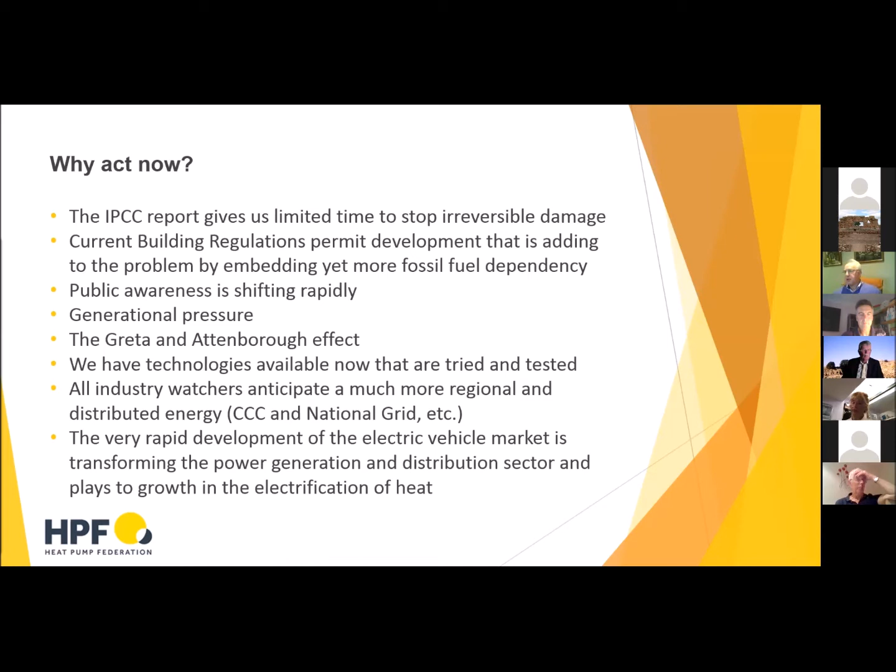So what's held us back? And I think this is one of the questions that people probably need to have some view on: why haven't we got lots of heat pumps already? Well, the simple fact is that we've had government policy since the 60s that favours North Sea oil and gas. That was seen as a massive asset, and indeed it was a massive asset. And successive governments have chosen to effectively give low-cost gas to the public for the last 50 years.

By contrast, if we were in Norway, the Norwegians chose not to burn any of their North Sea oil and gas. They sold the whole lot, put the money into a national wealth fund, and now own something like 4% of globally traded stock. Unfortunately, we don't have any legacy like that to look back on from our North Sea oil and gas time.

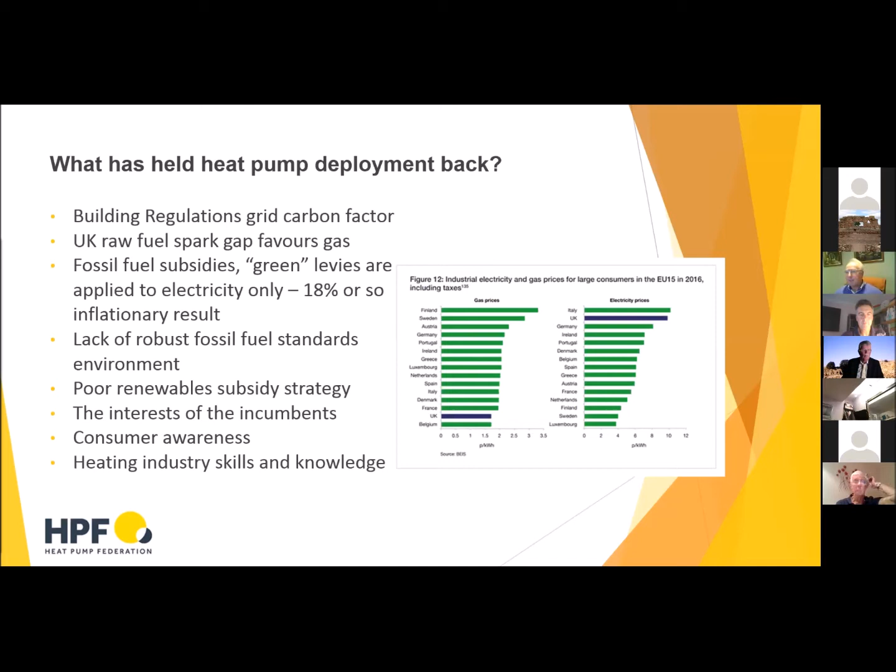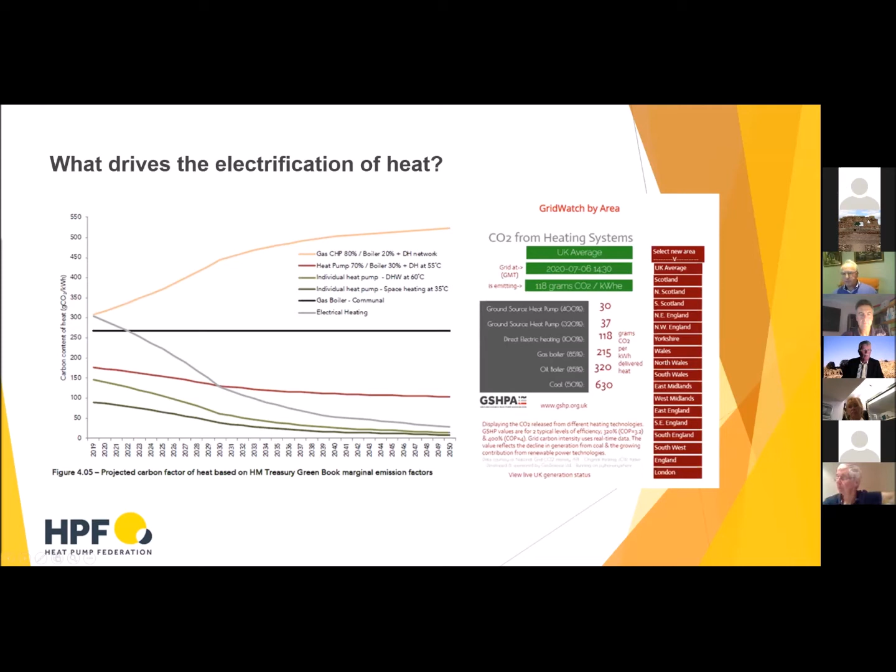So to heat pumps at last. I know you were thinking, when's he going to get to the heat pump bit? Okay, so here it is.

So what we've got inside the box is we're harvesting some low temperature environmental energy, either from the ground or from the air, doesn't really matter how we're getting it, and we're using it to apply some heat to the evaporator section of the heat pump. And in the evaporator, we are boiling the refrigerant that's sealed inside the heat pump and turning it into a gas. And we then put that gas into the compressor, which is the heart of the device. It's where we use pretty well all of the electricity.

And you'll remember, I hope, from your schoolboy and schoolgirl physics, that you can't compress a solid and you can't compress a liquid, but you can compress a gas. And when you compress a gas, it gets very hot. So we compress this gas that we've boiled, because the refrigerant boils at about minus 15 degrees. So anything we bring in from outside that's more than minus 15 degrees will boil the refrigerant. We then put that gas into the compressor and we compress it, and it gets very hot.

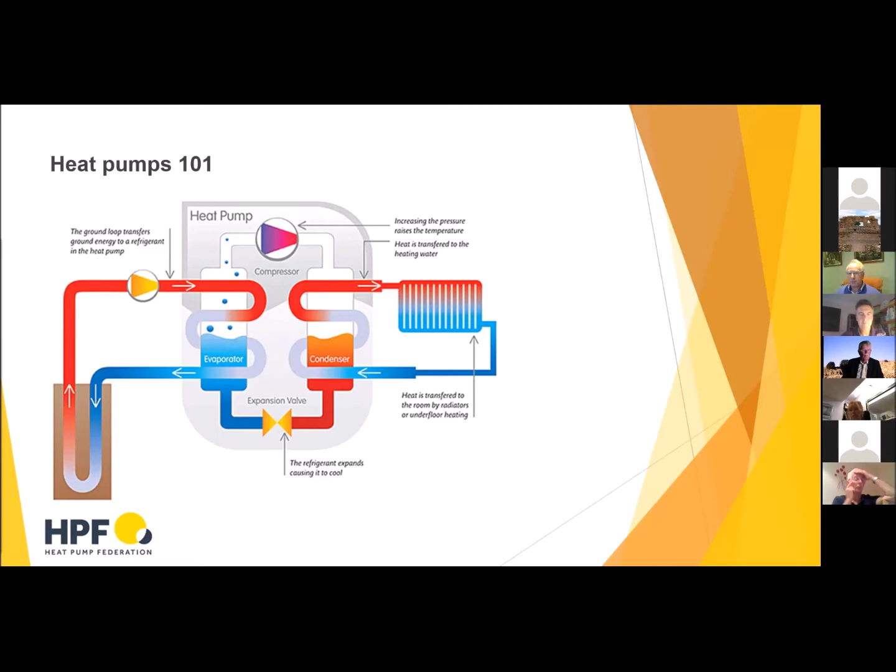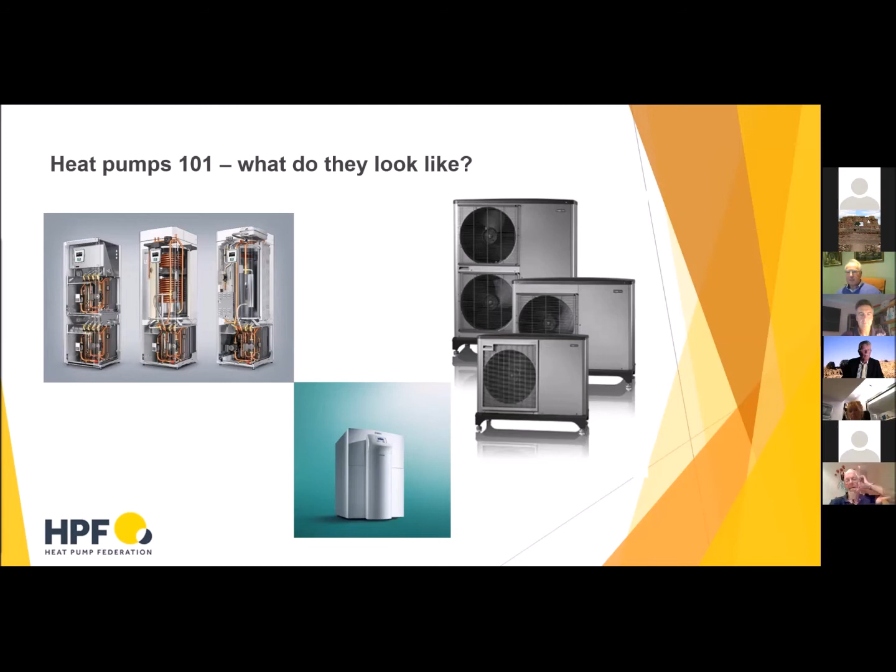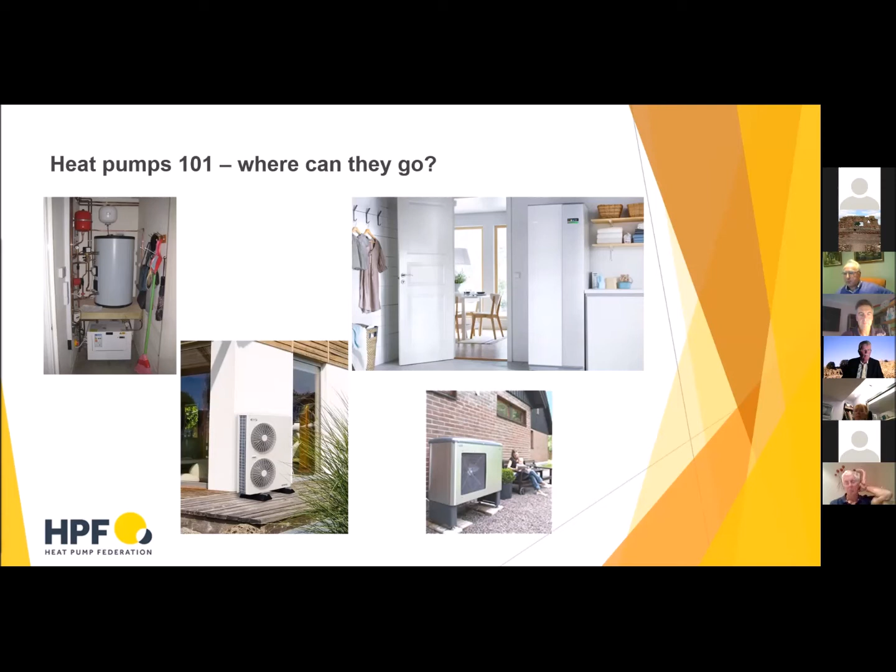One of the other questions we're frequently asked about is emitter type, and you may have heard comments that say, oh, heat pumps only work with underfloor heating, you've got to have low temperature flow, you've got to have highly insulated buildings. All that, I'm afraid, is baloney. I can give you a heat pump that will do 120 degrees if you want it. It will be less efficient, absolutely, I accept that, but it can be done.

Please ignore any of the myths that you've heard about not being able to use heat pumps in hard to heat buildings. I've made my career as an installer. I spent 10 years as an installer, largely working in listed and period buildings. So we were putting heat pump systems into listed buildings. National Trust has got a huge fleet of heat pumps. They've realised that people don't want to particularly burn trees anymore.

So we can use any type of emitter. So underfloor heating clearly is great because it tends to operate at lower flow temperature. And the lower the temperature we ask the heat pump to make, the more efficient it is. So it's ideal if we can reduce the temperature, but it's not essential, and I will describe why in a minute. We can use standard panel radiators.

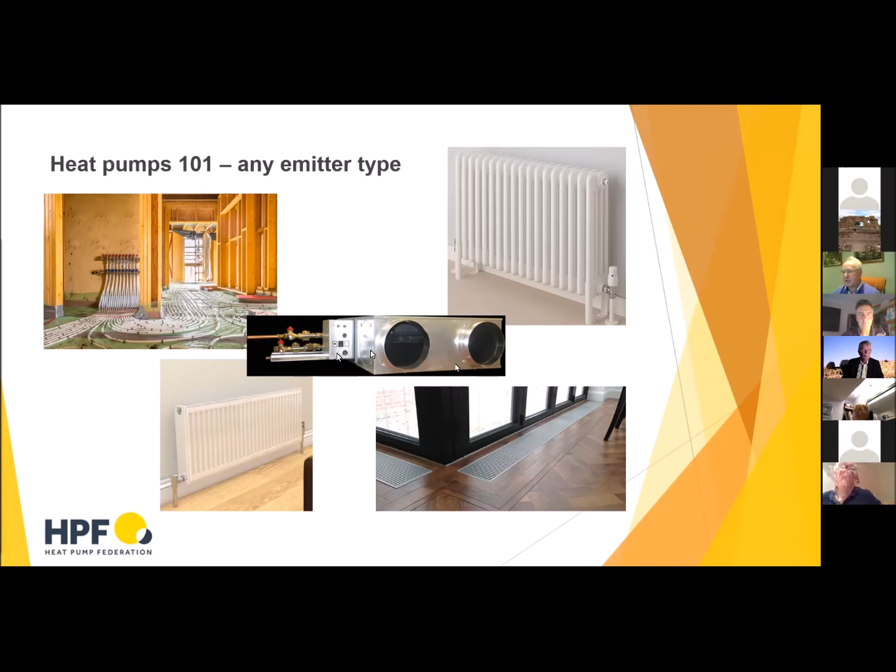And there's no regulation on hot water in a single dwelling. So there's nothing to point to. And what we would tend to do for best practice is say that once a week we will engage the immersion, and we'll elevate the temperature in the cylinder for an hour to above 60 degrees and run that as what we would call a sanitization cycle.

The impact on things like sharing resources between buildings is that it introduces legal issues in terms of selling buildings on. But if you've got buildings that are always connected, blocks of apartments, for example, then potentially one can get better economies of scale by combining units, either by having multiple individual units in each flat, which you connect to a shared ground array, or by having a much larger consolidated plant room.

So there can be some economies of scale, but in a single domestic environment, you're thinking about your own homes, the idea of tying them to another property does complicate things from a legal perspective when selling.

The design should be engineering led. At the moment we have these subsidies, so we have the Renewable Heat Incentive, and there are other schemes coming along. You'll have probably heard about the latest Green Homes Grant. All of these tend to queer the pitch for engineers to design the best possible system. So I would always try and encourage you to go for the best engineered solution first and see how that can then be optimized for any assistance that's available, rather than the other way around. We have some issues with planning consents, not a lot.

Ground source and air source both have permitted development rights for the vast majority of domestic installs in the UK, up to 45 kilowatts. And to give you a feel what that means, the average home in the UK, bear in mind, is probably something in the region of 10 to 12 kilowatts. So 45 is quite a large home.

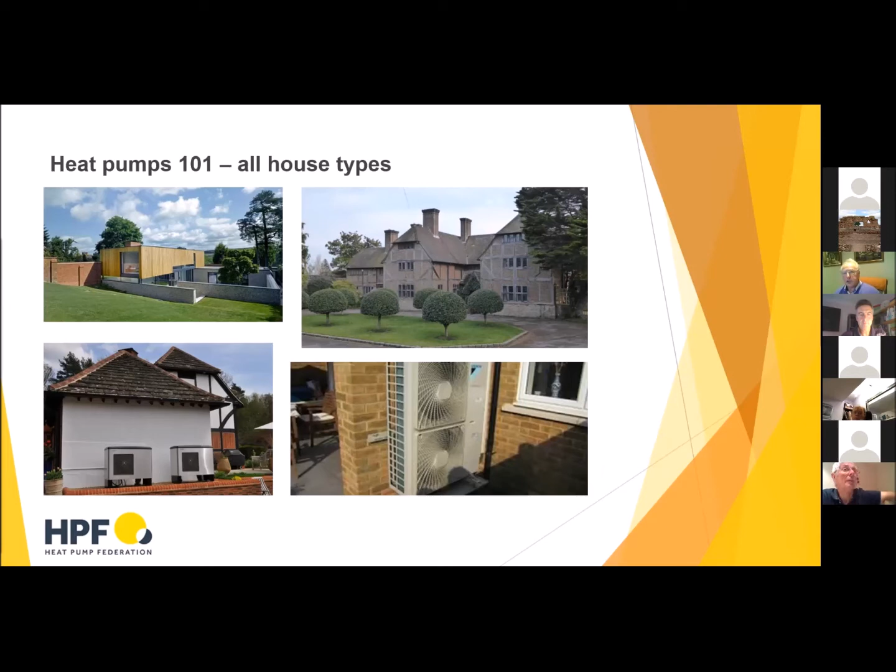The only thing with air source is that we have this issue about the noise, because clearly there is some noise outside, and there are regulations within the microgeneration certification standard, which if you meet those requirements, then you will have permitted development rights. So not to worry too much about consents.

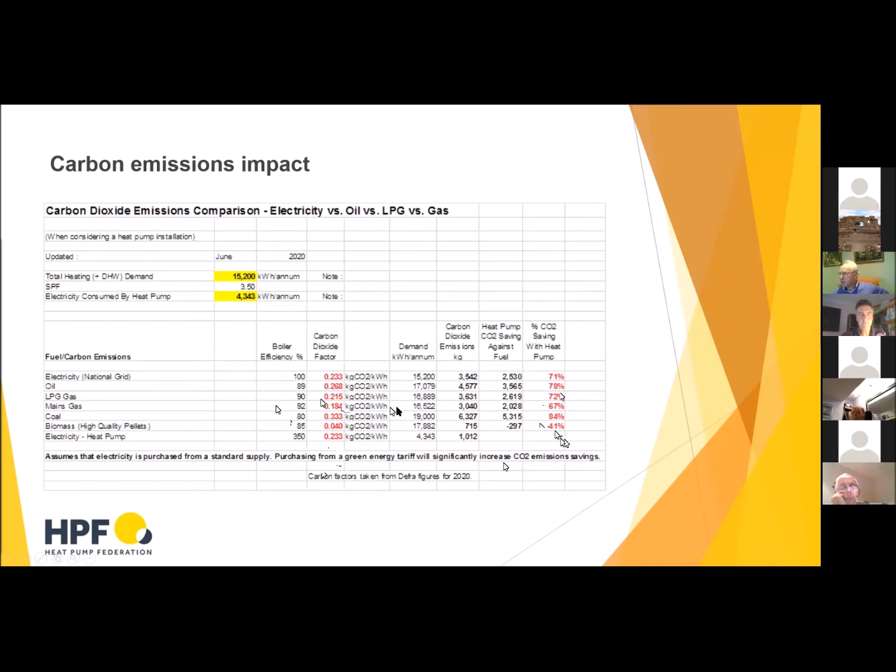And you can see that natural gas, we are already showing savings of nearly 70% against natural gas, oil nearly 80%. And of course, if the grid continues to decarbonise at the rate it is now, you can see those savings going up massively. And all heat pumps are zero emitters at the point of use. So these emissions are at generation level. What it also means is you're not getting the NOx and the SOx and the particulates at domestic level. So your towns and cities are being cleaned up from an air quality perspective.

Here's a little piece on what we think some of the key factors are for homeowners. So what are the considerations that would go through your head if you were thinking about putting a heat pump in? So there's this question about fossil fuels work. We're told that boilers are great. Well, do we really know how efficient our boilers are? We've got this resistance or fear of change. Well, I tell you, you've already got a number of heat pumps, so actually there's nothing to be frightened of. There's nothing to be resistant to.

We value energy very poorly in the UK because gas is so cheap. Most of us don't really value energy that highly. It's why we find it very difficult to get people to insulate their homes. Very difficult. It used to be very difficult to get people to put in loft insulation, even when the materials were being given away for free. So we need to improve the way we value energy.

Capital cost of change is the big one. Clearly, moving to a heat pump of any sort is significantly more expensive than replacing your fossil fuel boiler. And we have the operational cost. This is back to the spark gap, in that you've got to be running a heat pump very efficiently on standard tariff electricity in order to be able to compete with particularly gas. And there's just general knowledge and understanding. People are not yet very well aware and attuned to the electrification of heat.

On the positive side, we've got the environmental attitudes. We've already talked about Sir David Attenborough and Greta, and the intergenerational pressure. We've got some regulation beginning to come through. So MEES, that is the minimum energy efficiency standard, which applies to rented properties. So if any of you have got buy-to-let properties or anything like that, MEES would apply. And we have building regulations changes coming up.

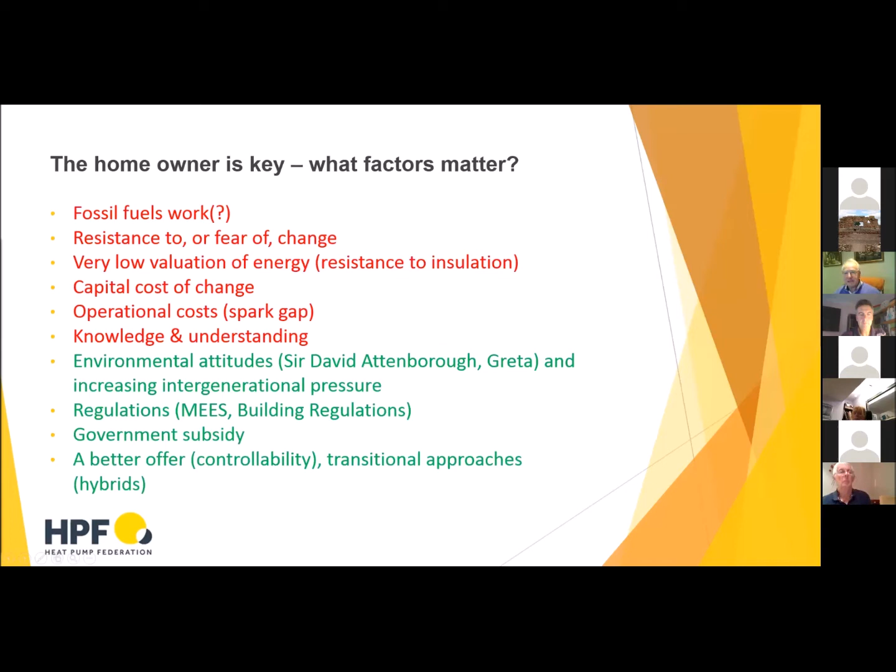And with the Green Homes Grant, which obviously has had quite a bit of publicity and is due to come into force, applications should be open soon, you can now get a grant of up to £5,000 to contribute towards a heat pump system, up to 2/3 of the cost of the heat pump system. Where this does have real value, I think, is that you can take the grant to assist with the capital cost and then claim the domestic renewable heat incentive.

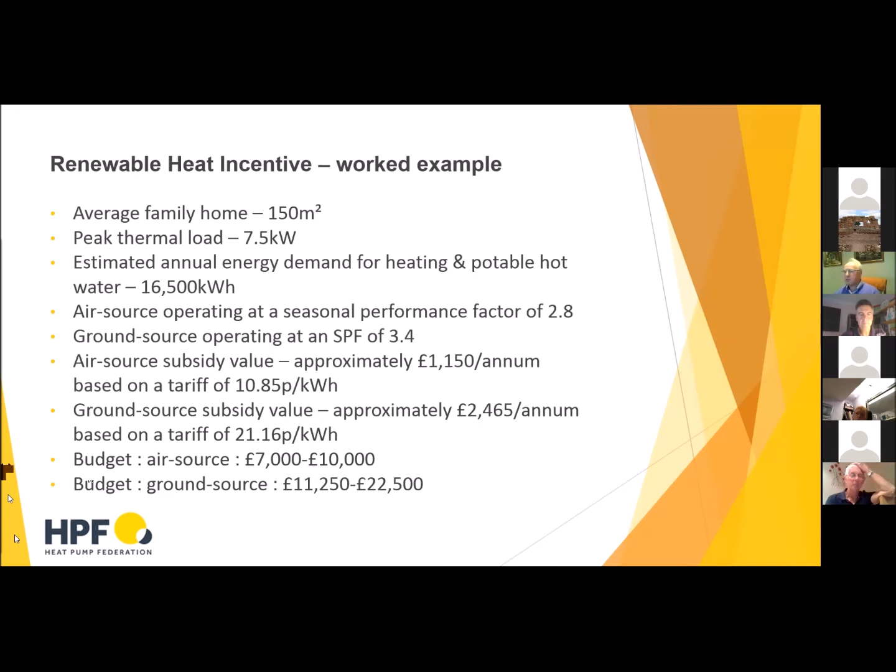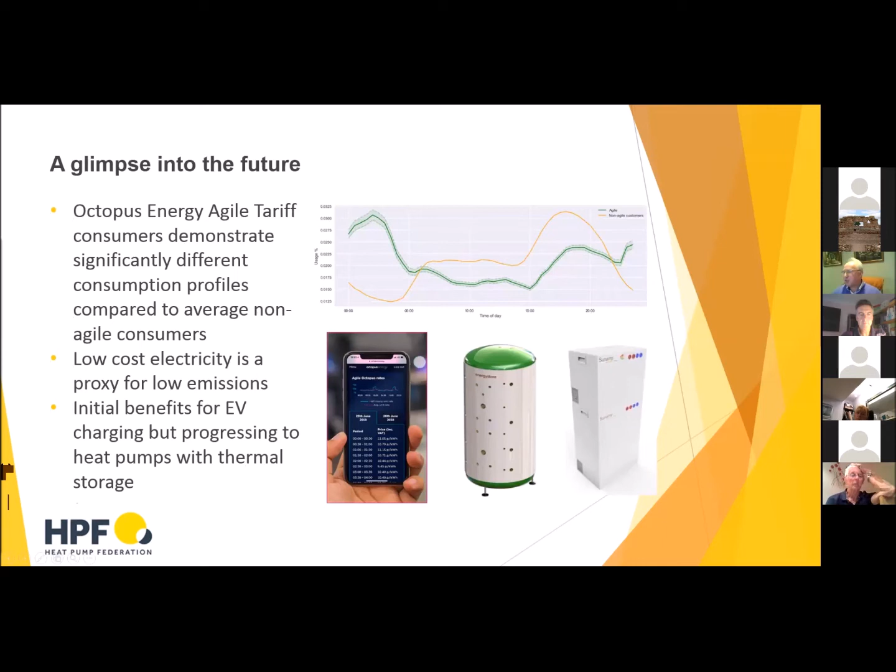A quick glimpse of the future. So this relates to this energy storage question. So many of you will be familiar, and you're going to hear about electric vehicles in a couple of weeks, so perhaps I'm preempting here, but the concept here is you charge your electric vehicle overnight on a low-cost electricity rate. It's the same principle applied to night storage heaters. We can do exactly the same with thermal storage.

So the two devices there, you've got a cylinder of hot water, which is a very simple thermal storage device. The other rectangular device, that's a phase change battery, and you can store very crudely 4 times the volume of energy in a phase change material than you can in water. And the value of this is shown in the graph above.

So this is a piece of data taken from Octopus Energy's Agile tariff, which is their primary tariff for EV users. And the orange line shows the profile of a standard electricity user. So their peak demand is between sort of 4 and 8 o'clock in the evening. The Agile tariff peak is the green line. You can see that by allowing people to charge their electric vehicles overnight, the peak has been moved.

We've reduced this peak, which is the maximum generation peak that we need to reduce because that's when most households are using their electricity. And this electricity, whilst it's low cost, it's not a straight line relationship, tends to be lower carbon too. So that's the real value. And we can do exactly the same by running heat pumps on those same sorts of tariffs and storing the thermal energy.

Current policy, just a very quick one here. Evidence suggests that we've no idea what the government's really thinking yet. There is no long-term plan for energy at the moment in the UK. We haven't got an energy white paper yet, but it's due this winter. We are waiting for the heat and buildings strategy. That's due in the autumn. We're waiting for the update to building regulations and the new Future Homes Standard, which should come in 2025. Building regs, as I say, we should get in Q1 next year.

We've got an electrification of heat task group running at the moment, which is brand new, so government are beginning to take it seriously. We've got very low ambitions for domestic heat pump installation so far, so that needs to change. And we've got no effective strategy at all for non-domestic, so commercial heat pumps. So there's still a massive amount of current policy work to do.